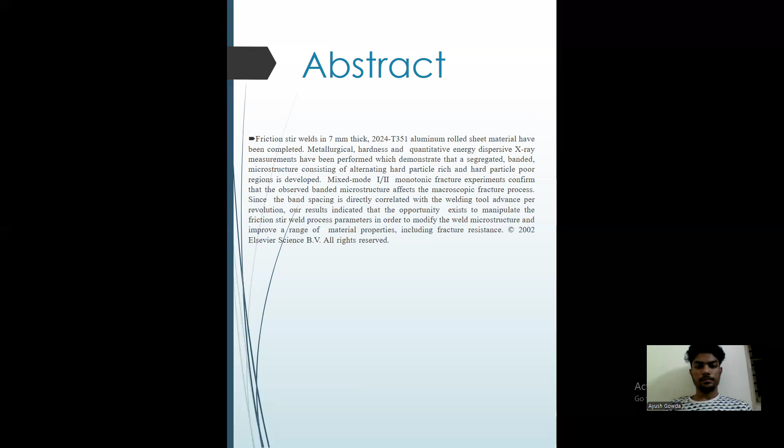Introduction. The difficulty of making high strength, fatigue and fracture resistant welds in aerospace aluminum alloys, for example 2XXX and 7XXX series aluminum, has long inhibited the use of welding processes for joining aerospace structures. Typically, mechanical fastening has been the joining method of choice, except in production of pressure vessels for rocket propellant and oxidizer tanks. Even in pressure vessel applications, heavy weld lands must be incorporated to account for the severe property knockdown resulting from the fusion welding processes.

Many of the problems with welds in aerospace aluminum stem from the unfavorable distribution of brittle solidification products and porosity in the weld region. Friction stir welding is a relatively new technique for making solid state welds in aluminum alloys. Encouraging results have been obtained when FSW has been applied to high strength aerospace aluminum alloys that are typically difficult to weld. Friction stir welding was invented at The Welding Institute, UK in 1991. Since that time, it has been introduced into commercial practice in a number of applications.

Although aluminum alloys may be joined using conventional fusion welding techniques, certain aspects of friction stir welds make FSW extremely attractive for the joining of aerospace alloys. Of greatest importance is the fact that the process occurs in the solid state and therefore the formation of brittle solidification products is minimized and grain boundary liquation cracking does not occur. Heat input is in general significantly lower than fusion welding processes.

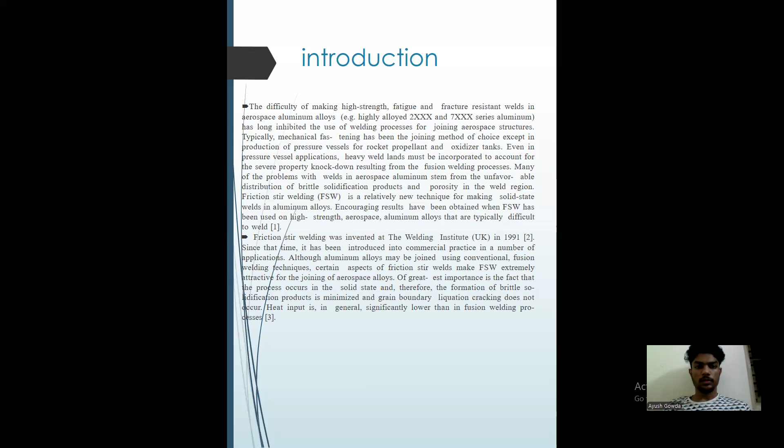In this work, a 1.22 m by 2.44 m by 7 mm thick sheet of 2024-T351 aluminum was cut into two square pieces. These were friction stir welded together using a tool with a 23.0 mm diameter shoulder and 8.2 mm diameter pin. The measured process parameters were a rotational speed of 360 rpm and a travel speed of 3.3 mm per second, perpendicular to the rolling direction of the sheet.

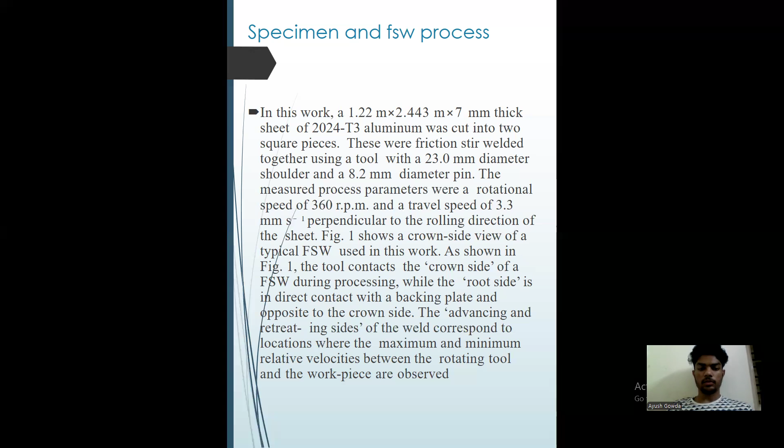Figure one shows a crown side view of a typical FSW used in this work. The tool contacts the crown side of the FSW during processing, while the root side is in direct contact with the backing plate, opposite to the crown side. The advancing and retreating sides of the weld correspond to locations where the maximum and minimum relative velocities between the rotating tool and the workpiece are observed.

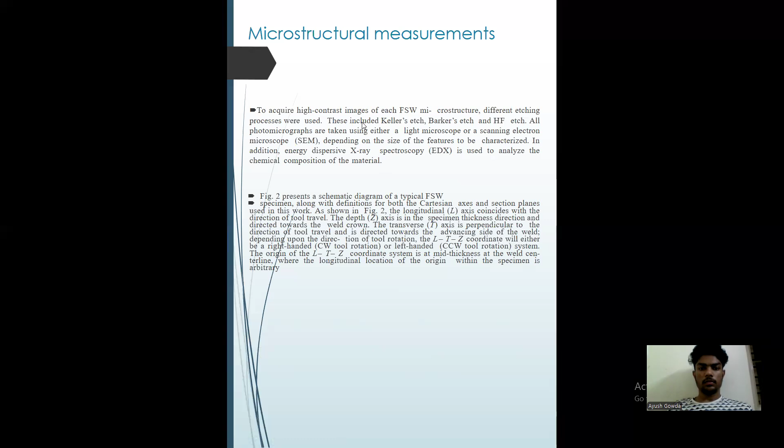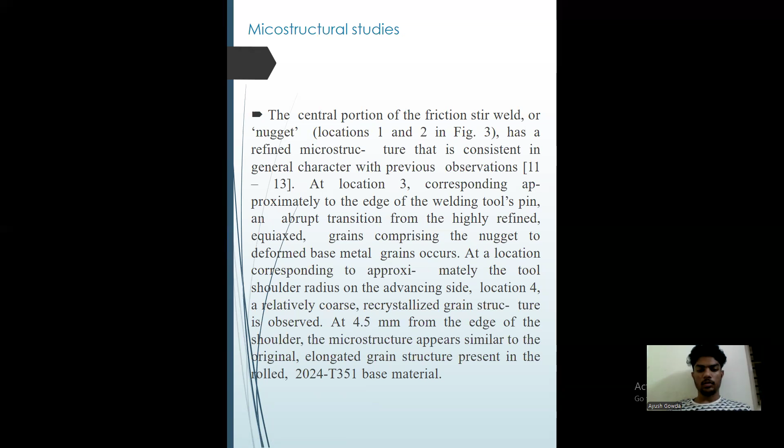At location 4, a relatively coarse recrystallized grain structure is observed at 4.5 mm from the edge of the shoulder. The microstructure appears similar to the original elongated grain structure present in the rolled 2024-T351 base material.

This finding indicates that the homogeneity of the weld microstructure may be modified by changing the welding parameters. For example, one expects that band spacing will decrease as the tool advance per revolution is reduced. A smaller band spacing should result in a more homogeneous structure within the weld. However, changes in the tool advance per revolution have ancillary effects on weld energy and hence local material properties within the weld.

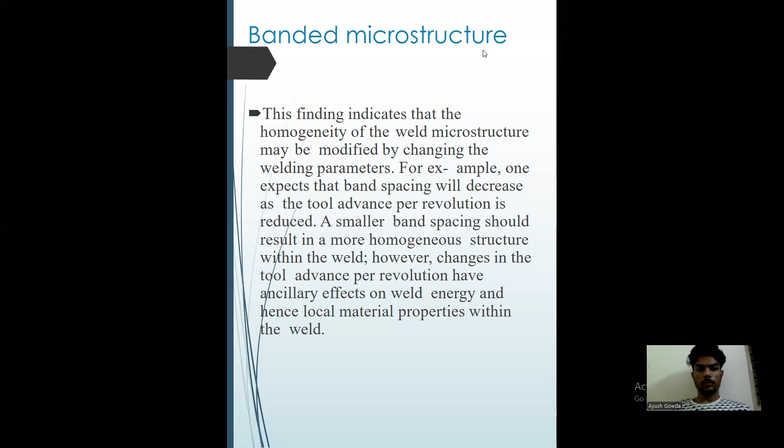Relationship between fracture and banded microstructure. The crack grows almost vertically towards the advancing side of the FSW for a distance of 5 to 6 mm from the weld center line to a position near the edge of the welding pin. As the banded microstructure turns towards the load direction, the fracture path continues along the general direction of the bands until the crack direction is aligned with the loading direction.

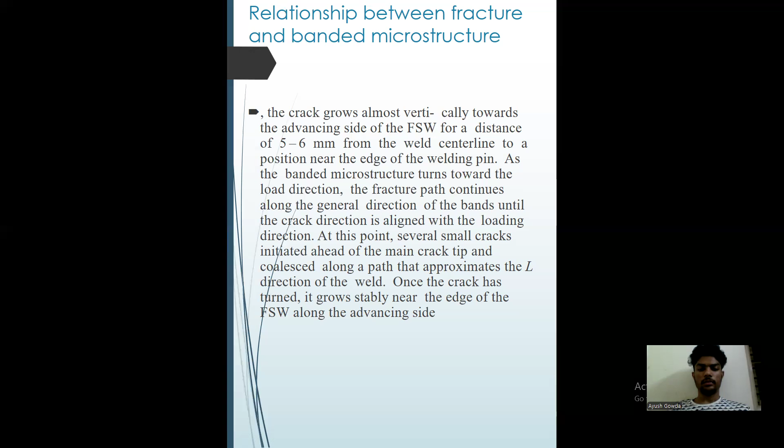Several small cracks initiated ahead of the main crack tip and coalesced along the path, approximately in the L direction of the weld. Once the crack has turned, it grows stably near the edge of the FSW along the advancing side.

Discussion of results. The presence of clearly defined bands in the 2024-T351 microstructure appears to be due to the parameters chosen for the FSW joining process employed. The FSW process requires rotational extrusion of material around the front of the tool. This extrusion takes place in a very thin layer of material surrounding the tool, and large strain and strain rate gradients are predicted.

It is conjectured that the segregation of particles results from the entrainment of the particles in the region corresponding to high strain rate gradient. If the particles are large relative to the distance over which the strain rate changes appreciably, then the particles may tend to roll towards the low strain rate region, resulting in clearly defined bands of high and low particle density.